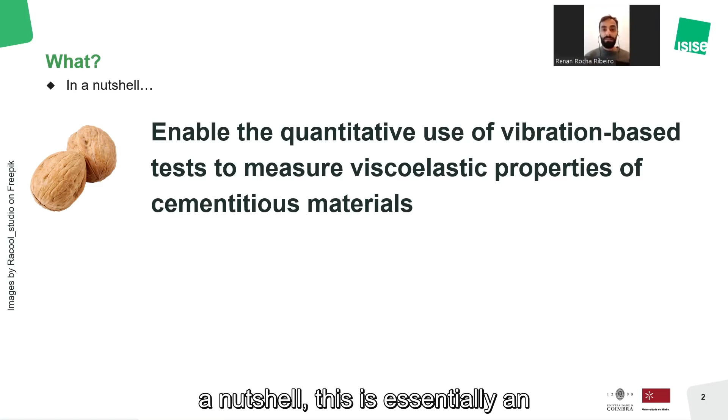So let me kick things off by stating the objective of the research. In a nutshell, this is essentially an experimental work that explores the use of a class of tests, here referred to as vibration-based tests, to characterize the viscoelastic properties of cement-based materials. The key point here is to perceive how we may shift the perspective of viscoelastic testing from traditional static tests to vibration-based tests, which has been done in other fields, but is still not used or common, at least

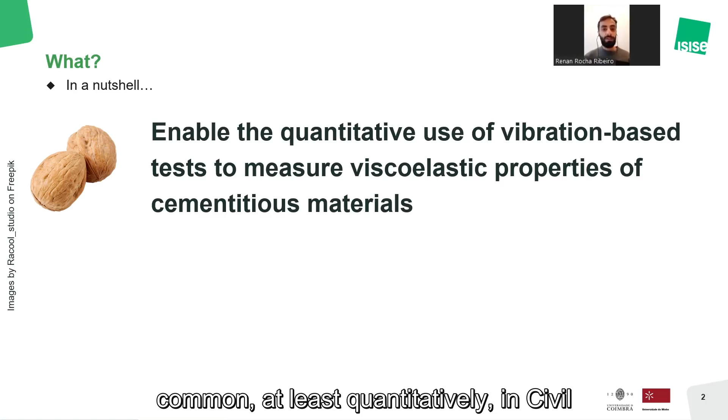quantitatively, in civil engineering. Cracking the nutshell open, we specifically aim to first develop a reliable test method, then produce quantitative data equivalent to traditional methods, and once we hold a grip on all of that, explore what novel information they can provide regarding the viscoelastic behavior of cementitious materials.

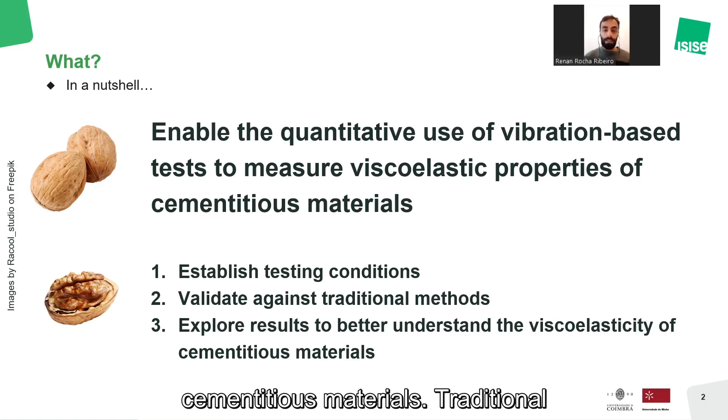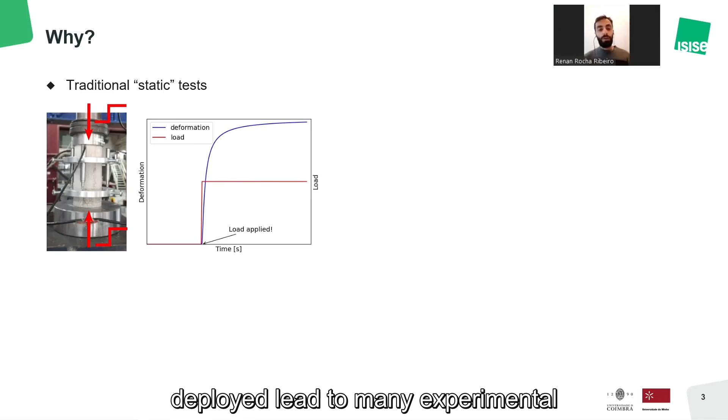Traditional static tests consist of applying a load with a step function and monitoring the deformation of a specimen over time, which gives the material compliance function. The way usual setups are deployed leads to many experimental weaknesses, some of them listed here.

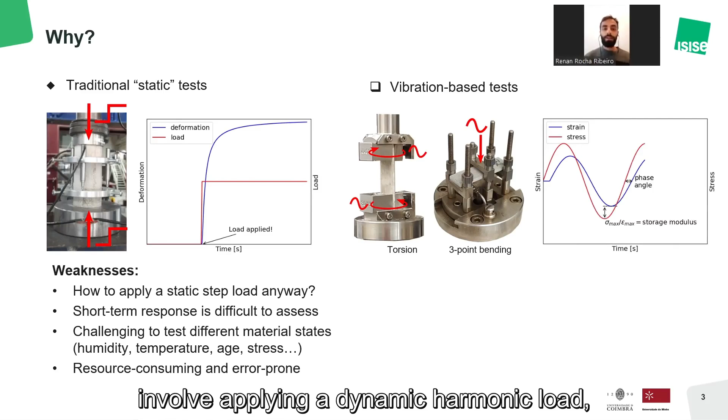Vibration-based tests measure viscoelastic constitutive parameters in a totally different approach. These tests involve applying a dynamic harmonic load, which may be torsion, bending, tension, or any other type of effort, to a sample and measuring the phase shift and peak difference between the load history and the sample response.

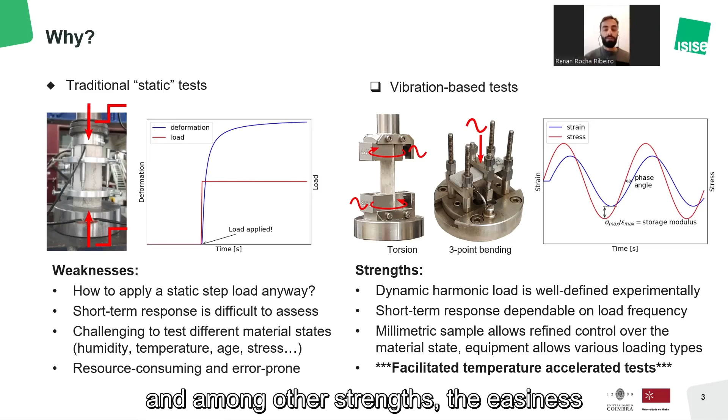Some weaknesses typical of static tests are then avoided, and among other strengths, the ease with which temperature is controlled during a vibration-based test may allow us to explore the concept of accelerated creep tests in cementitious materials, which is yet to be fully understood and validated and may constitute a big experimental advance.

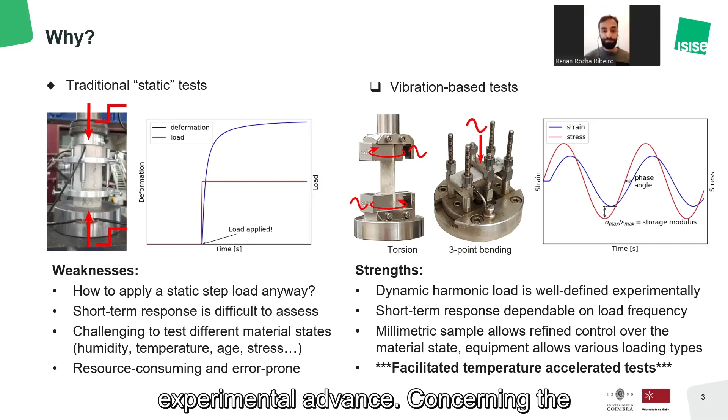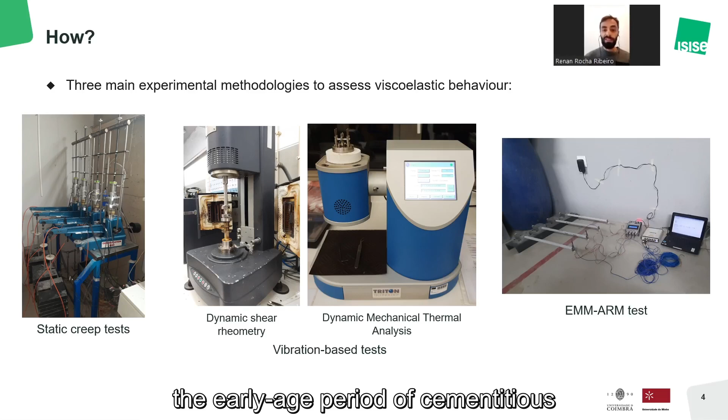Concerning the methodology, this research is built around three main experimental tests: static creep tests, which will produce our gold standard data; vibration-based tests, which have a central role in this research and will be performed with dynamic shear rheometers and DMTA machines; and with a supporting role here, the EMM-ARM test, which will help to uncouple the solidification and viscoelasticity processes when we tackle the early age period of cementitious materials.

And now, lastly, maybe you are wondering where the digitalization is in all of this, since this is the main theme of the cluster I'm part of. Actually, as this is essentially a development research, a big part of my work is finding solutions to experimental issues for which no solution is reported in the literature. And this is done mainly within a digitalization frame.

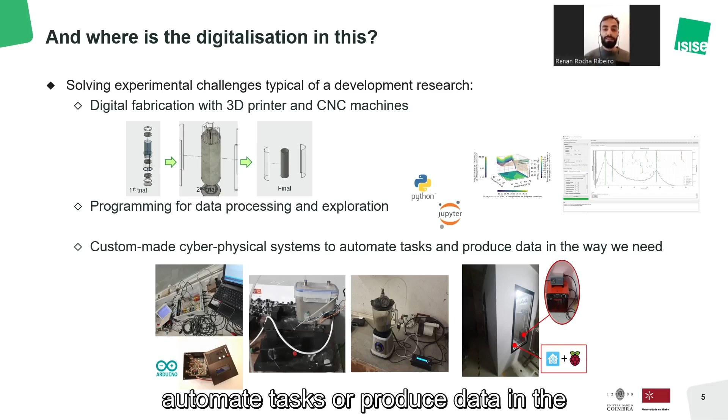This involves several development activities such as digital fabrication, programming custom software for data processing and exploration, and development of custom-made cyber-physical systems to either automate tasks or produce data in the precise way we want. So this was a brief presentation of my doctoral research.